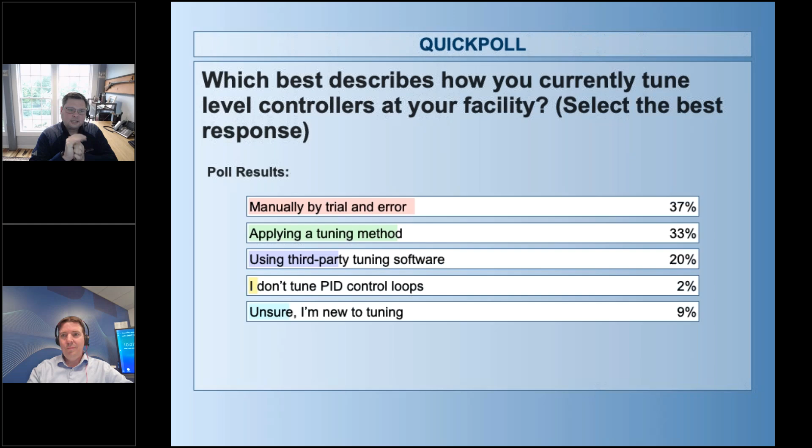Sure. So as we said, we'll show you how to tune and give you tips about level control tuning, but why it matters, right? Before we get into the types of response that you want, level control will help you in different aspects. First, there's a safety component. Why safety? Sometimes it could be water, but sometimes you have chemicals, different processes, and tanks, and some of those tanks are even open. So if you don't have good and effective level control, you might spill, you might have overflows, you might have overpressure. All of this can put you at risk on the safety side.

There could be workers underneath. If it's a chemical spill, you can add regulation aspects to it, which may need to be reported. With good level control, we have the safety of the people or the environment, but also safety related to your equipment. We all know pumps cannot run dry. There's an interlock that will stop it, but do you really want to reach the interlock? You don't want to stop your processes, have downtime, have to restart. So the safety aspect is one of the things we consider when we do level control.

And if we go even deeper into regulation, I talked about environmental permits, spills, and reporting. If you go into a boiler system, which is highly managed, the level controller inside a boiler is a critical aspect, and it needs to be done. There are a bunch of other components with the burner management systems that you need to meet, but level control will be one of the aspects. If you have good, reliable, stable control, then all the rest will fall in place and help you meet those regulations and be safe. So safety is one, and then we can go into efficiency.

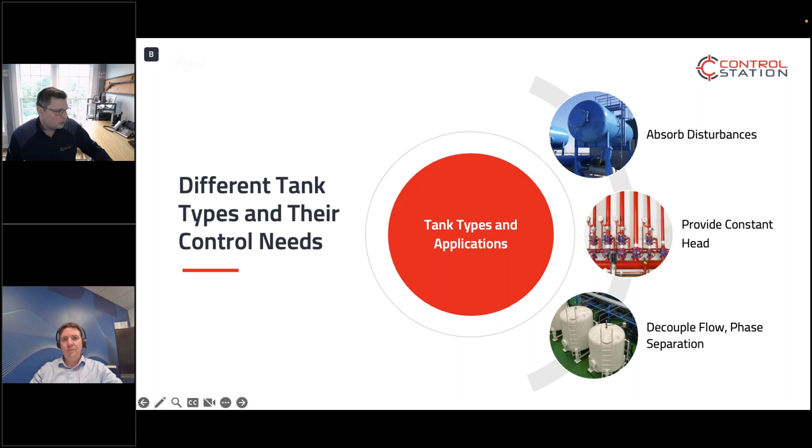And so Maxim's going to talk now a little bit about those kind of different processes themselves. We talked a little bit about the objectives. What kind of processes are those? Yeah, thank you, Bob. So if you're responsible for tuning the loop, right? So Bob explained that there's different types of processes. So your role will be to decide, well, what do I need to do?

And we'll show you how to pick the tuning. Basically there's different types of response, okay? So you may want to have what we call a fast response. You can say it's aggressive tuning. If you have those types of tunings, you will go faster to set point, and if there's a disturbance, you will reject it fast, right?

We seem to think that fast is always good, but it may not be. An example of control that needs to be fast: let's say you have a standpipe, water header distribution, flotation cell. You want to be fast. Why? Let's say a water distribution header, right? There's many clients looking at this level, drawing water or product from that controller. So if the level changes, we have a change in pressure, then everybody is affected.

So those need to have what we call fast response to be stable, so all the clients don't see any changes, right? And they're not affected by each other. So if one draws a lot, the other one is not affected because the main level is stable and you're fast. So fast response is good.

If we talk about a flotation cell, in mining, if you're not familiar with the mining industry, we have what we call flotation cells. Basically, we grind all the rocks very, very small, and then we send that into a flotation cell where there's water and air coming up with chemicals, and it makes bubbles. The chemical process is that the metal you want sticks to the bubble and goes to the surface, right? So there's a kind of froth that floats in the flotation cells.

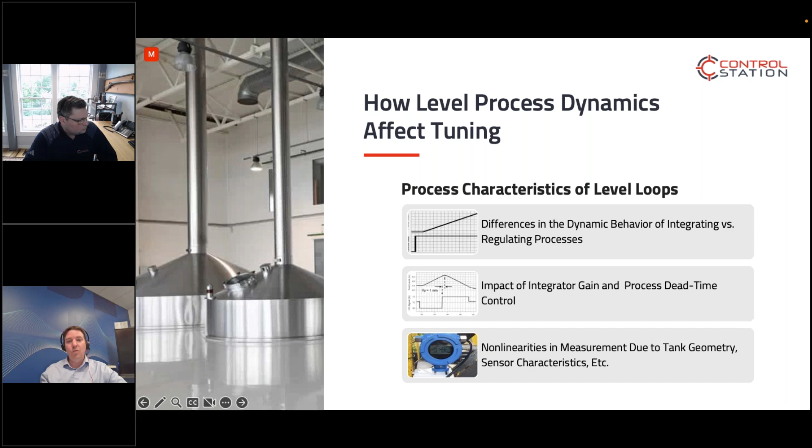We'll talk a little bit about those, but now we'll show you how to model an integrating process response. So it's relatively easy. We're looking for only two things, and with those two things, we will come up with your proportional gain, your integral gain. So the first thing that we want to do is the one we see in the middle with the theta p. So it's the dead time.

Dead time is the easy one to know, is like how much after I make my move. So you see the CO is my output. So either I'm pumping more or I'm opening a valve. I can see my response. So after I move, how much time it took for my level to start moving, that's my dead time. Okay, dead time is really important because it basically sets the speed of the whole response.

So usually there's kind of a rule of thumb that says that you cannot go faster than 10 times the dead time for your stabilization, right? So it's really an important factor that you need to pay attention to with your dead time. The second one we want is what we call the integrating gain, which is shown here with KP. So basically, it's easy in this solution.

You don't need to be stable, so you make the level go up, and then you make a break, you make it go down, and you compare the second slope minus the slope one divided by the change in your CO. So what it's telling you is for every, let's say, percent of movement I do in my controller output, how much my level will change, let's say every second or minute based on the unit time you have. So it's giving you a hint that if I move by 1%, how much it increases or decreases every, let's say, minute, because in this graphic it says minutes.

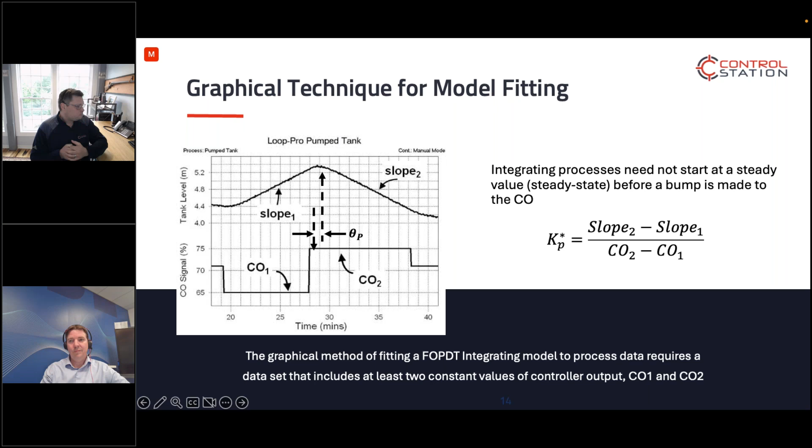So go ahead and go to the next slide here, and I want to talk a little bit about objective and trying to determine how fast you should make your tank, right? And so we talked about control objectives early on. We talked a little bit about, some need to be very fast, some need to be very slow. Well, how do you actually turn that into a number that you can use in the tuning formulas, right? And what I want everyone to start thinking about from a level control perspective is the idea of what is known as an arrest time.

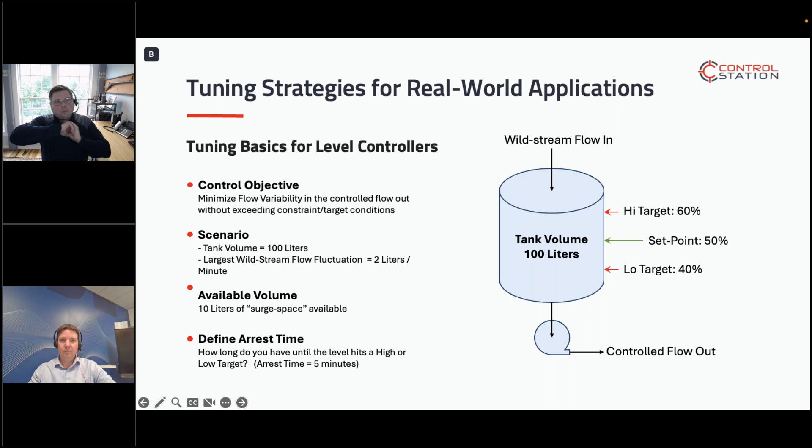It's basically how long does it take for the process variable to arrest or stop a disturbance, right? You're running along at set point, everything's good. All of a sudden you get hit with a disturbance, your level starts to drift up, and you have to turn back around to bring the level back. The time it takes to turn is an arrest time. And so how do you think through what the arrest time is for a process? What is appropriate? And so I'm going to go through a very simple mental exercise with the example on the screen here of how you come up with an acceptable arrest time. And really, you need to understand the process, right?

Which is pretty important for tuning any loop, is understand the process, understand the tanks, understand the flows, kind of understand what's going on with the process. So here I've got a tank, it's 100 liters, right? It has 100 liters of liquid. It's a very linear tank, right? So it's pretty simple. Target's at 50%. So there's 50 liters inside the tank.

And let's say we have high and low targets that we have to stay within, right? So as long as we're beneath 60% and above 40%, everybody's happy. That means that if I'm sitting at target, I've got about 10 liters above and 10 liters below my target that the level can move safely within, all right? So it's basically kind of the capacity of level that I have to safely move.

Now, think about the imbalances that can occur, because as Maxim said, if in equals out, the level doesn't change. The only time the level changes is if there's a flow imbalance between the in and the out. What is the biggest disturbance or a typical disturbance or flow imbalance that this tank has to fight against? In this case, I like easy math, so we're going to say 2 liters per minute. The worst thing that can happen is a 2 liter per minute change, right? Which doesn't sound like much till you realize it's only a 100-liter tank, right?

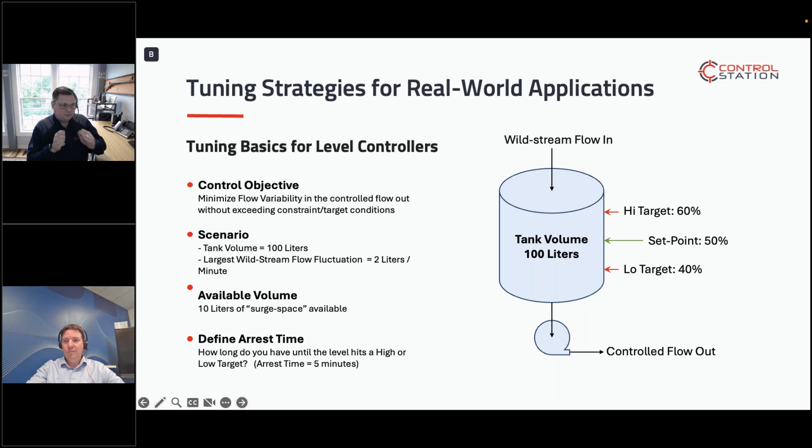And there's a couple of really interesting kind of tricks here. And one of them is around this reset time. And this is probably the least understood component when it comes to level control. Most level controllers, the reset time is way too fast, right? You may not want a 30-second reset time on a level controller. It may be in the 5 to 8 to 12 minutes, depending on what the objective is.

Because if you look at what that reset time represents, it's 2 times the closed loop time constant plus the dead time. And so if you think through the idea, the dead times for level loops generally are on the smaller side, right? They could be 5, 10, 20 seconds. Time constants, on the other hand, could be a little bit larger, maybe 5 minutes or 2 minutes. In our exercise, it was 5 minutes.

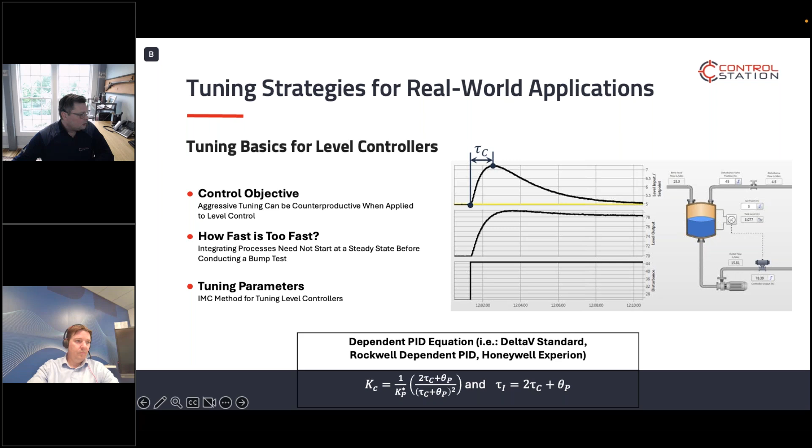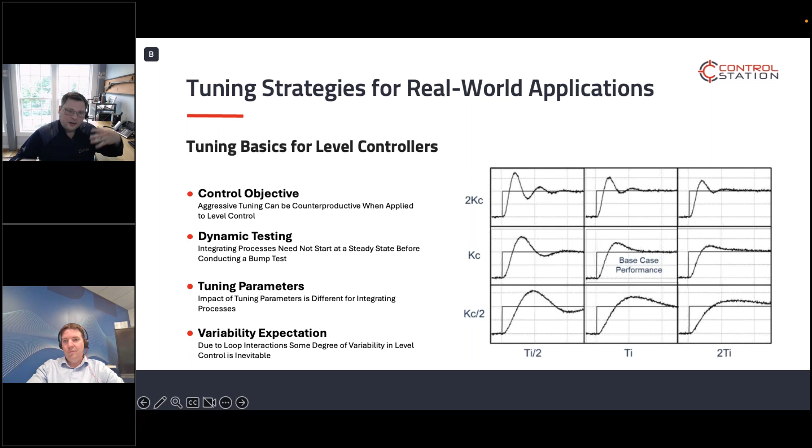You know, from the standpoint of the different applications in the real world, Vera, if you want to go to the next slide, Maxim's going to talk through some of the other challenges and issues that level controllers can crop up with. Yeah, thank you, Bob. So I'll cover different aspects and different mistakes and put kind of a warning sign for you, right?

So let's talk about the tuning. So we learned if we want to be slow or fast, right? So let's talk about overtuning. Overtuning means I push too much, right? So you may meet your objective. Okay, let's say you want a fast response and you push your overtuning, but it may create issues. So you may look at other aspects than just the level itself, because the control element may work too much, right? So you may be really tight on your set point, but you may have too much.

So if your valve or your equipment are working too much, you will have more wear and tear, more maintenance, and maybe change, fail, and eventually failure. You can add to that energy consumption to move this. And again, if you open your vision beyond just the level, overtuning can send disturbance downstream, create oscillation, and then affect the processes, whatever it is, quality issues.

Undertuning as well, kind of the reverse effects. If you're too slow, then you may miss your mark. You talk about the arrest times. If you were too slow, then you will go over, maybe spill, or you may go under and trip the pump, so you have to stop. And all of this also, as he just showed, if the gain is too slow, it may be oscillatory, oscillatory in the level, but also downstream affecting your quality. So this is for your tuning. So be careful and look upstream and downstream of your processes when you pick your tuning.

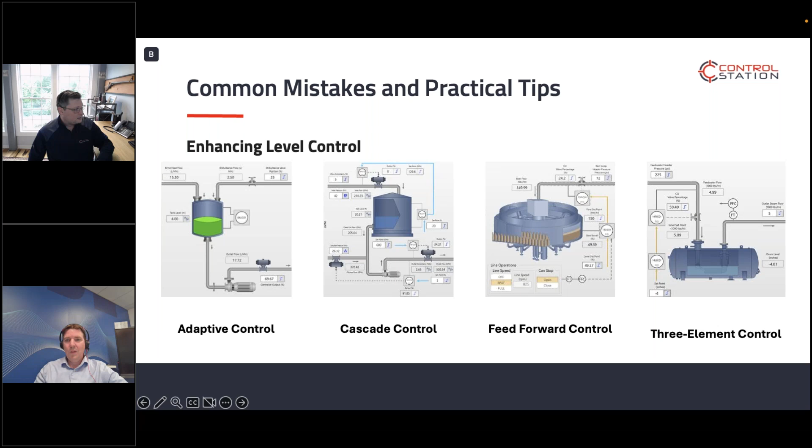Sure. I'm sure we've left you 2 minutes to cover all of Cascade, right? Yeah, no, it's a simple Cascade application, right?

The issue in those types of control is that we're drawing water from a header that has other clients. So let's assume that the pressure is not that great. Some client takes a lot of water, so the pressure drops. Let's say my valve is open 50%. If the pressure gets higher, I get more flow, so the level might increase. But if the pressure drops, then I will get less flow.

So in those situations, what's going to happen? The pressure has dropped, I have less flow, so the level starts dropping. I measure it, and I say, well, open the valve. But I'm reactive, right? The level needs to move away from set point for me to measure it and then ask for a different position. So I'm subjected to all this instability.